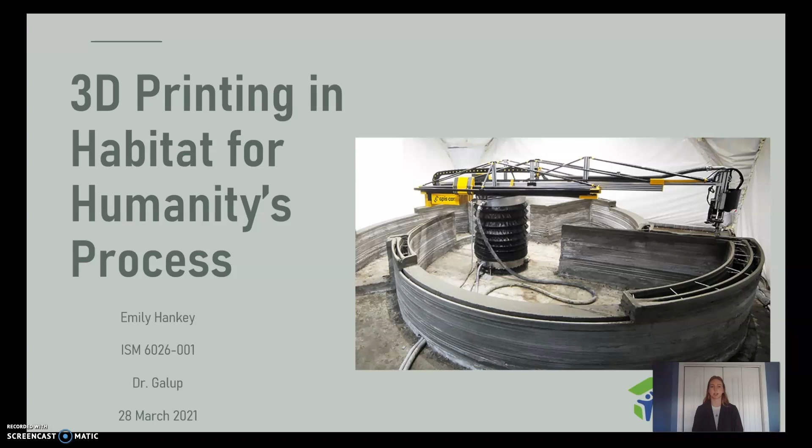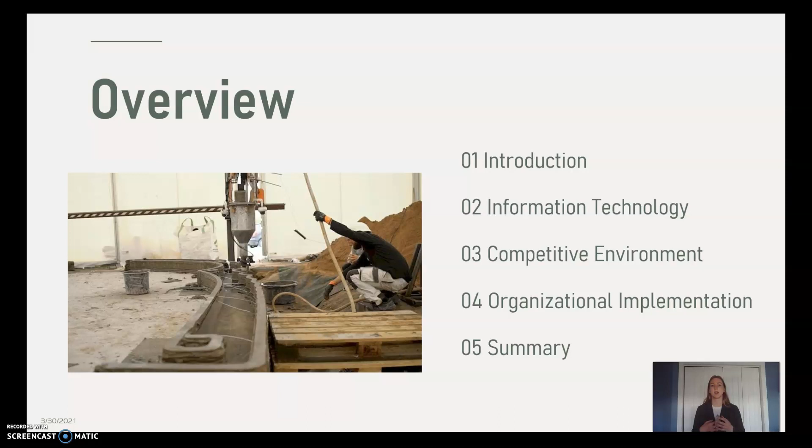Good evening. My name is Emily Hankey, and I will be presenting the benefits of 3D printing in Habitat for Humanity's process. Before I begin, I'd like to provide a brief overview of what my presentation will talk about. I'll begin with an introduction on Habitat for Humanity and the benefits of 3D printing in their process. I'll speak about the information technology needed to be successful. I'll discuss the competitive environment with an emphasis on the competitive advantage. I'll discuss the organizational implementation along with my 4 critical success factors. And finally, I'll present a summary of what I spoke about.

Habitat for Humanity is a global nonprofit organization. They focus on rebuilding low-income communities and communities that have been ravaged by natural disaster. Their current process takes about 6 to 8 months to construct a home, and homes can cost anywhere from $135,000 to $165,000. By implementing 3D printing in their current process, Habitat for Humanity will benefit from lowered costs, shorter timelines, and have a more sustainable alternative available to them.

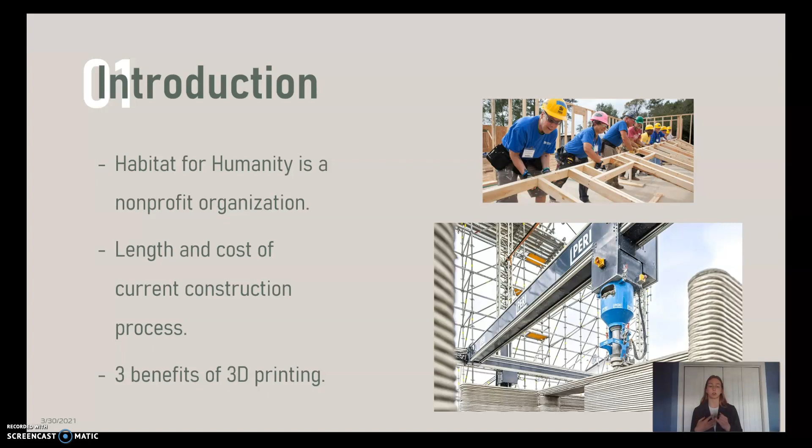3D printing functions through computer-aided design technology. This allows architects to go onto a computer, create a blueprint, export the blueprint, import it into the 3D printer, and the 3D printer implements it. 2 softwares that I've found to be most compatible with 3D printing are ArchiCAD and Cedreo. Thankfully, these are 2 softwares that are currently implemented in the construction industry, so many architects have prior knowledge and experience working with both of these. Otherwise, if we have new architects coming into the industry, both these softwares are very user-friendly and easy to adapt to.

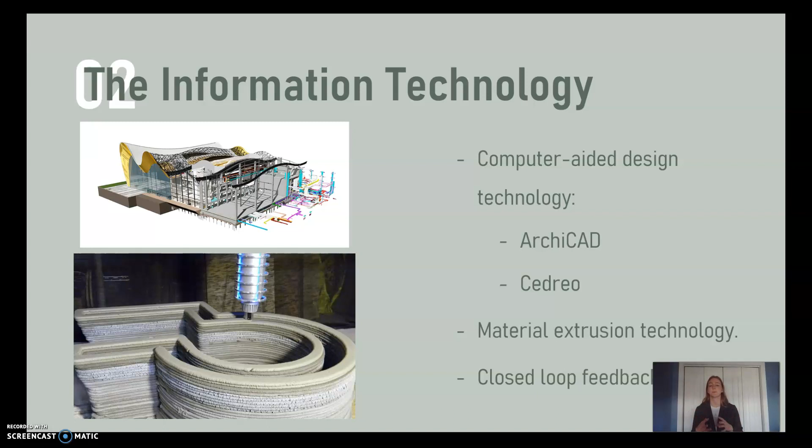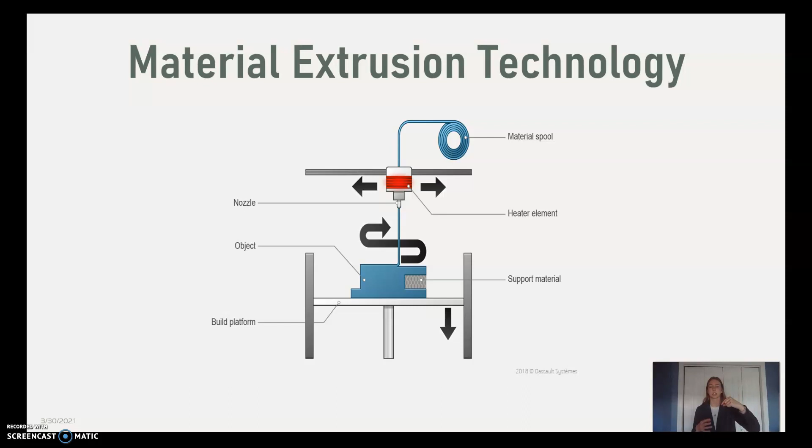3D printers utilize material extrusion technology, which is conducted through a closed-loop feedback system. I'll get into material extrusion technology on the next slide, as I have a visual that walks you through the process a little bit more. But the importance of a closed-loop feedback system is that any disturbance is accounted for. So whether that be human disturbance or outside disturbances such as debris floating through the air, it won't affect the finished result. So here's the visualization of material extrusion technology. As you can see, a spool of material, which will be inside of the printer, will be deposited outside through a heated nozzle, and it will be deposited layer by layer.

So the competitors most affected by the implementation of the 3D printer would be traditional construction companies that rely on semi-automatic and manual laborers. We want them to see Habitat for Humanity adopt this process and see the benefits that Habitat for Humanity begins to experience, and we want them to say, why can't we do this? A great example of a company that's been able to implement the 3D printer successfully in their process is a company by the name of Wasp. And they were actually able to construct this home in 24 hours for a little under $1,000. And not only were they able to experience time and cost benefits, but they were also able to utilize waste that was from the rice harvesting process. So they were able to create a sustainability aspect out of it as well.

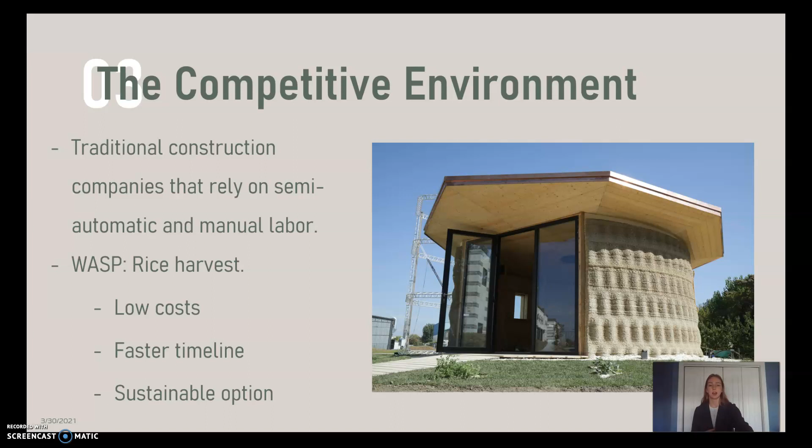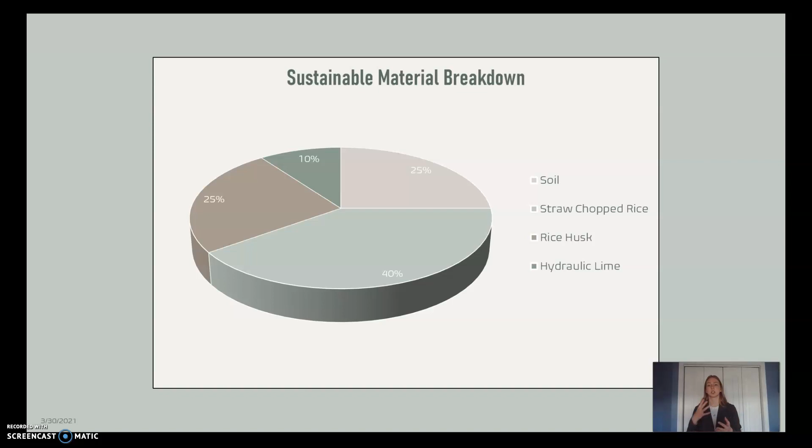Now, I'm going to be looking at 4 critical success factors that I've deemed important for the organizational implementation of the 3D printer in Habitat for Humanity's process. So my very first one is going to be accuracy of the data. We want to ensure that we're putting ample amounts of resources into our research and development side of things. We want to ensure that our material extrusion technology, our closed loop feedback system, and our software is the best that it can be. So the only way that we can do this is by investing in it and ensuring that we're putting the money into research and development.

Next is materials used in the process. So we have two options really. We could go a more standardized route, or we can go a more customized route. So the standardized route would be using a concrete mixture, and this would cost less between the two. And this would also ensure that the buildings would be weather resistant, as concrete is the most durable material. Or we can go a more customized route. And the customized route would be a little bit more expensive, as it would require a team of engineers to filter through what we wanted to use as material and ensure that there's no fiber or sediment in the material that we want to use.

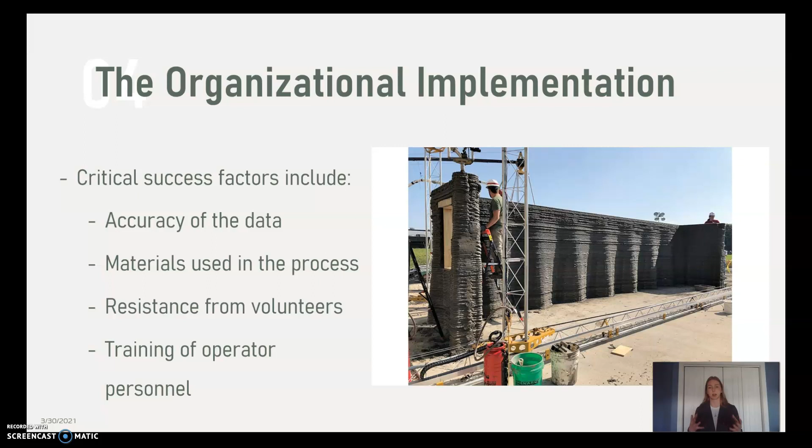So in summary, I spoke about Habitat for Humanity and the benefits that 3D printing would bring to their process. I discussed the information technology needed to be successful. I discussed the competitive environment with a focus on the competitive advantage that 3D printing brings to the industry. And I discussed the organizational implementation along with my 4 critical success factors. Now, 3D printing would bring lowered costs, lowered timelines, and an alternative to be more sustainable into Habitat for Humanity's process. And we just need to ensure that the implementation is really thought out, and it would be successful and a good fit for Habitat for Humanity.